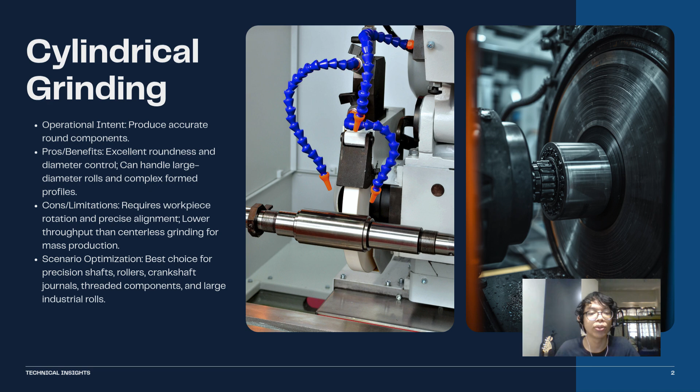Internal grinding is essentially the same concept but applied to the inside of a bore. A small grinding wheel is mounted on a spindle and inserted into the bore to grind the internal surface. Because the wheel must fit inside the bore, it is necessarily smaller than the bore diameter. The wheel rotates at very high speed to compensate, needing higher RPM to maintain the required surface speed.

The workpiece typically rotates in the opposite direction to the wheel. The operational intent is to achieve high accuracy internal surfaces and bore geometries that cannot be reached by external grinding methods. The pros: it produces highly accurate bores and internal profiles, enabling precision finishing of hardened internal features.

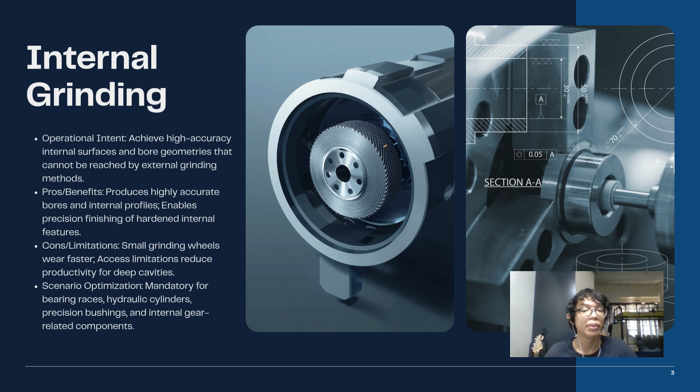But it also wears out faster, has access limitations, and reduced productivity for deep cavities. It is mandatory for bearing races, hydraulic cylinders, precision bushings, and internal gear related components.

Centerless grinding grinds cylindrical surfaces without mounting the workpiece between centers or in a chuck. Instead, the workpiece rests on a support blade held between the grinding wheel and a smaller regulating wheel. The regulating wheel controls both the rotation speed of the workpiece and its feed rate through the machine. The grinding wheel does the actual material removal since there's no chucking or centering involved.

Parts can be fed continuously through the machine. This is called through feed grinding. The intention is to maximize production throughput for cylindrical components without using centers or chucks.

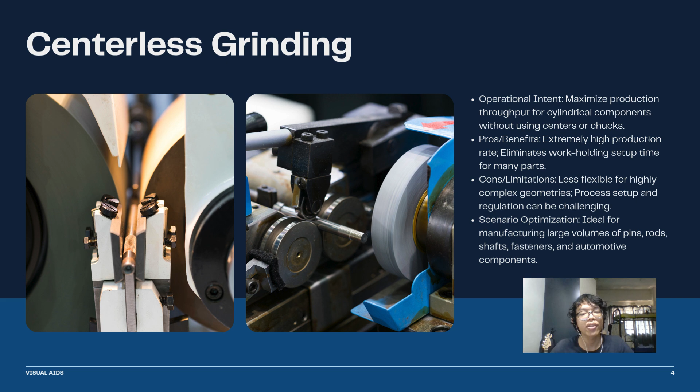It has extremely high production rate, eliminating work holding setup time for many parts, but it is less flexible for highly complex geometries, and process setup and regulation can be challenging. It is ideal for manufacturing large volumes of pins, rods, shafts, fasteners, and automotive components.

Creep feed grinding is a heavy-duty variant of surface grinding, where the wheel takes a very deep cut while the workpiece moves extremely slowly. Conventional grinding uses many shallow passes at high workpiece speed. Creep feed does the opposite: one or very few deep passes at very low speed.

The wheel is usually a soft grade resin bonded wheel with an open structure to allow coolant penetration and chip clearance across the large contact area. It is capable of removing large volumes of material in one pass, produces accurate complex profiles that would otherwise require multiple milling or broaching operations, and gives excellent surface finish on difficult materials.

But there's high wheel wear rate due to large contact area, requiring significant coolant supply to manage heat, and slower cycle time per pass compared to conventional grinding. It's best applied to aerospace turbine blades, forming tools, and any hardened component with intricate contour profiles where conventional milling would struggle to hold tolerance.

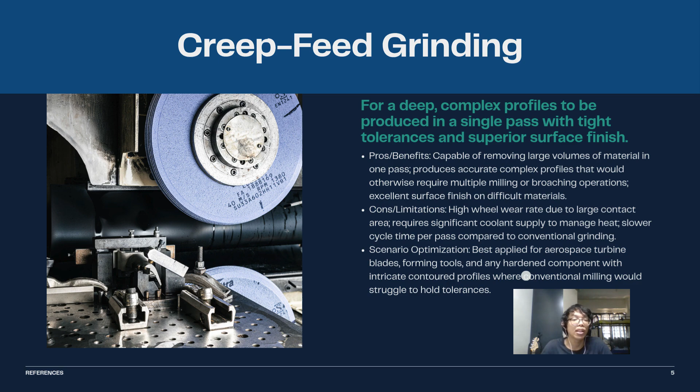Hard turning is the use of a single point cutting tool, typically CBN or ceramic, to turn hardened steel directly without grinding. It emerged as a potential alternative to cylindrical grinding for finishing hardened components. The operation involves the workpiece spinning on the lathe and a very hard cutting tool removing material in the conventional turning manner. The key difference from regular turning is the workpiece hardness, typically above 45 HRC, which would destroy conventional tooling.

Grinding offers superior surface finish consistency and better support for large, slender and flexible workpieces, but also has higher machine and operating costs, and greater energy consumption than hard turning.

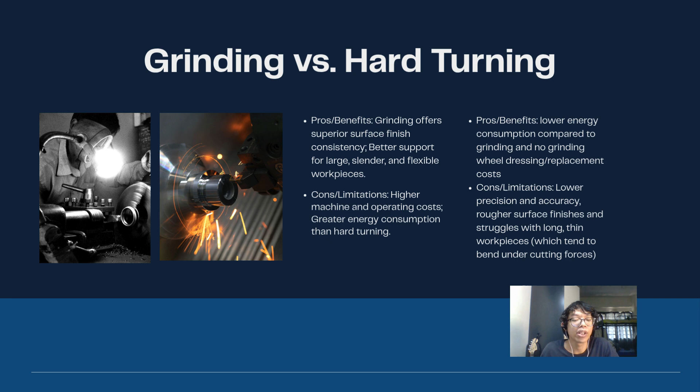Hard turning has lower energy consumption compared to grinding, and no grinding wheel or dressing costs, but also lower precision and accuracy, rougher surface finish, and struggles with long thin workpieces. The decision between the two usually comes down to volume, required surface integrity, and whether the workpiece geometry suits turning.

Beyond dedicated grinding machines, there's a whole family of tool variants designed for different work environments and scales, from precision tool rooms to heavy foundry work and field maintenance.

Universal tool and cutter grinders are highly adjustable machines used in tool rooms to sharpen and recondition cutting tools like end mills, drills, and lathe tools. Precision is their defining characteristic.

Swing frame grinders are large counterbalanced units suspended on a pivot frame. The operator swings the heavy grinding head across large castings to remove flash, gates, and surface defects—built for endurance and reach, not precision.

Portable grinders are handheld units, either electric or pneumatic, used for deburring, weld dressing, and surface cleanup in any location. Pneumatic versions are preferred in environments where sparks near electrical equipment are a concern. Bench and pedestal grinders are fixed workshop grinders used for routine hand sharpening of drill bits, chisels, and small tools.

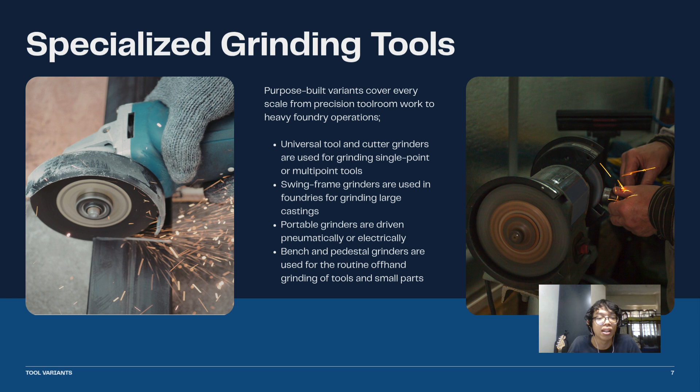Every workshop has one. The key principle is matching the tool to the environment and the scale of the job.

Grinding generates heat through friction between the abrasive grains and the workpiece. If this heat isn't managed, it causes thermal damage: surface burns, microstructural changes, residual tensile stresses, and dimensional distortion.

Grinding fluids are typically water-based emulsions for most operations, or straight oils for thread grinding, applied at the grinding zone to cool the workpiece, lubricate the contact, and flush chips away. This improves surface finish and dimensional accuracy, reduces workpiece temperature, and extends wheel effectiveness.

On the other hand, fluid handling and disposal increase operating costs, and improper fluid selection reduces effectiveness. It is critical for precision grinding of hardened steels, thread grinding operations, and any process where thermal distortion could cause scrap or rework.

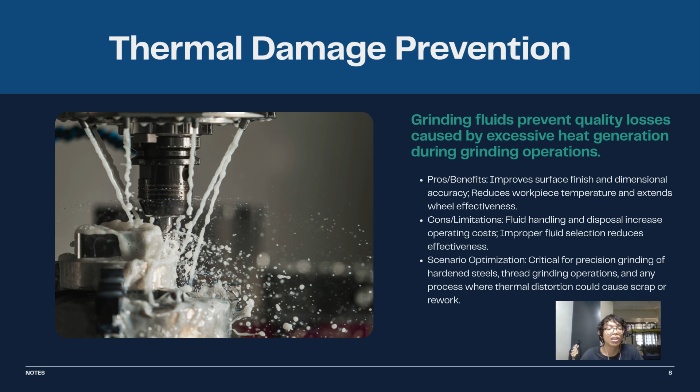Grinding chatter occurs when vibration disrupts the grinding process, leading to poor surface finish and dimensional inaccuracy. Identifying root causes is essential for achieving optimal grinding performance.

To prevent chatter, we have to inspect bearings and spindle condition, check wheel balance and wheel uniformity, evaluate wheel wear and dressing practices, improve workpiece rigidity and support, reduce material removal rate if necessary, and verify external vibration sources.